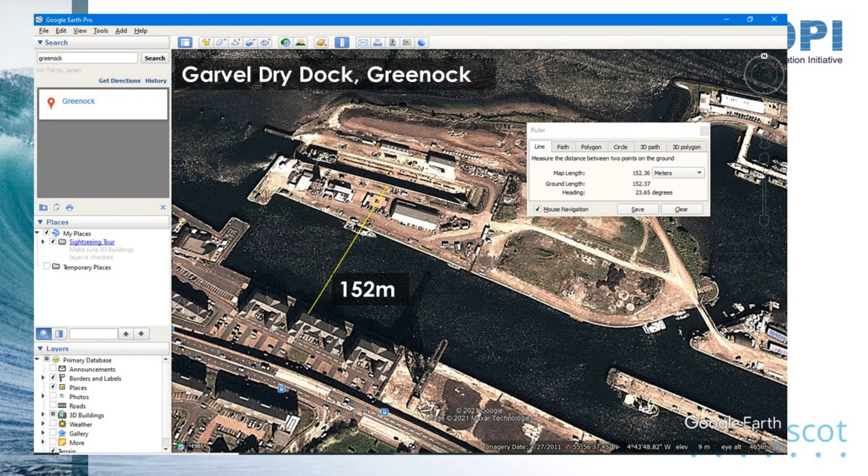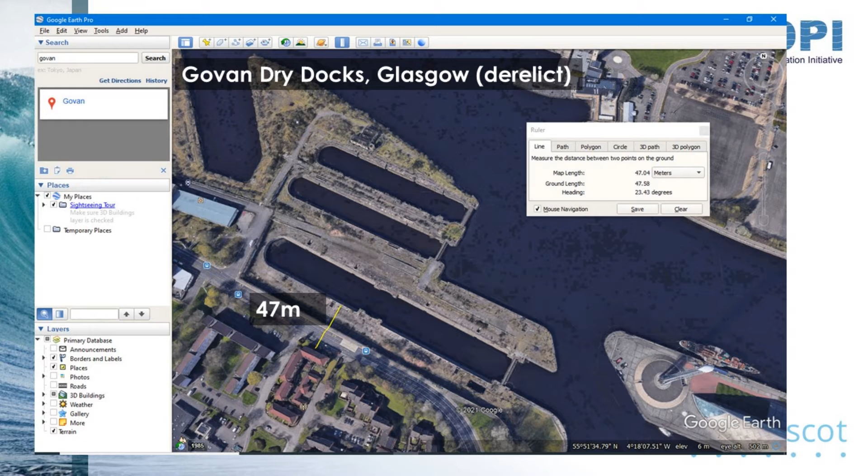Another issue with the Govan docks and waterfront sites in general is increased risk of flooding due to climate change. In the SEPA flood data, you can see the Govan graving docks are at high risk of coastal flooding, and there's a presumption in Scottish planning policy against allowing new, particularly residential, developments on a flood risk or floodplain location.

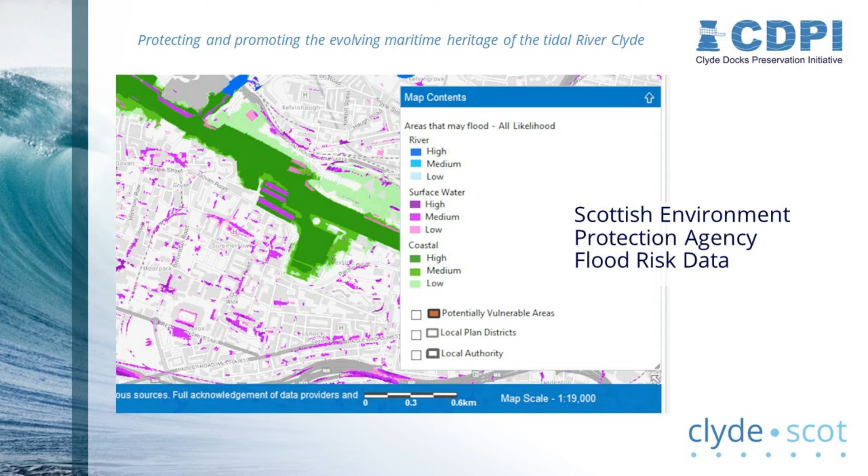But in the past few years, we've seen a significant shift in attitudes towards waterfront regeneration on the Clyde. The suitability of housing development is no longer a given. At the start of 2018, we saw proposals from Ferguson Marine to bring the Govan graving docks back into use as a ship maintenance and engineering facility. It's fairly certain, with the previous housing proposals being refused planning consent, that if Ferguson hadn't gone into administration over the ferry contracts, this proposal would most likely have gone ahead, even if it needed a compulsory purchase.

This is King George V dock between Govan and Braehead. We see proximity to housing isn't an issue here. It's surrounded by industrial estates, retail parks, and a large water treatment works. KGV handles mostly raw materials and bulk cargo vessels, and recently several cruise ships have been laid up here while out of service due to the COVID situation.

Rothesay Dock in Clydebank was actually closed for several years before being reopened not that long ago. This also handles small bulk cargo, and there's a marina and fuel bunkering facility here as well. Of course, bunkering of new fuels is something that sustainable shipping will depend on, and that's something we'll need to think about for the Clyde.

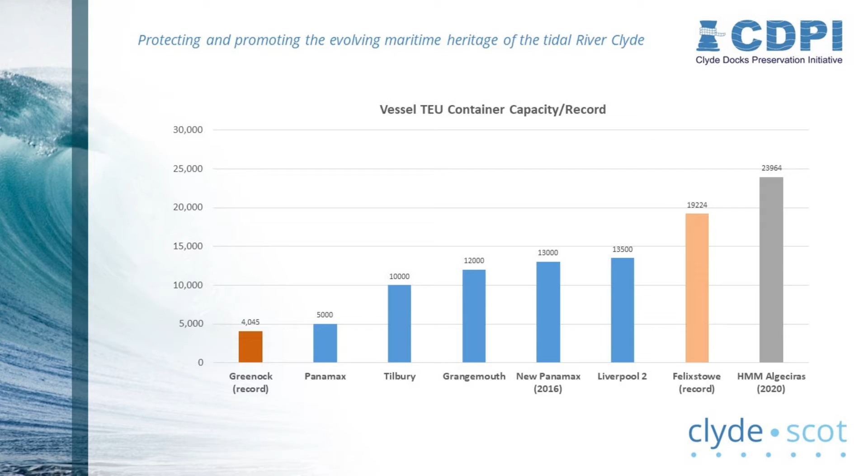If we look at the berthing depth capacity though, it suggests that Greenock could handle more, at least on the seaward side. Though, as mentioned, the lack of a rail connection could be a limiting factor, as well as perhaps available space for storage at the terminal.

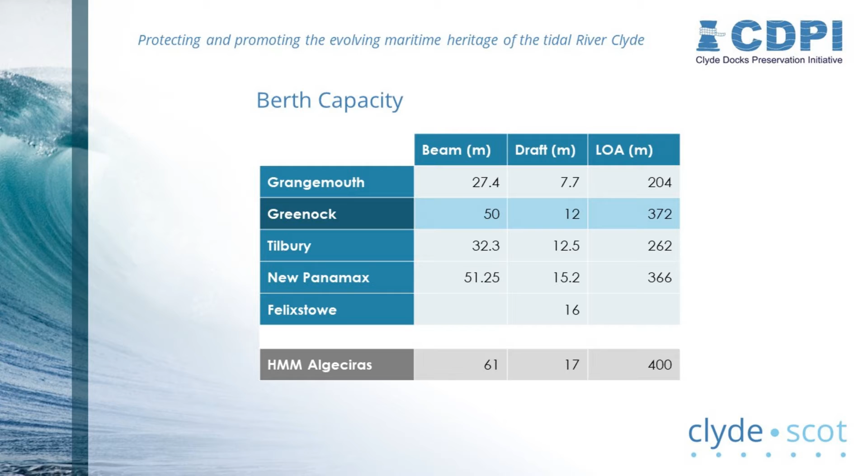So what all this points to is that perhaps the future of the Clyde is in smaller scale operations, but with a focus on developing new technology and innovation. We've already heard in the first webinar about some of the technological potential in sustainable shipping, and we have the strong association with shipping and maritime heritage as an added incentive.

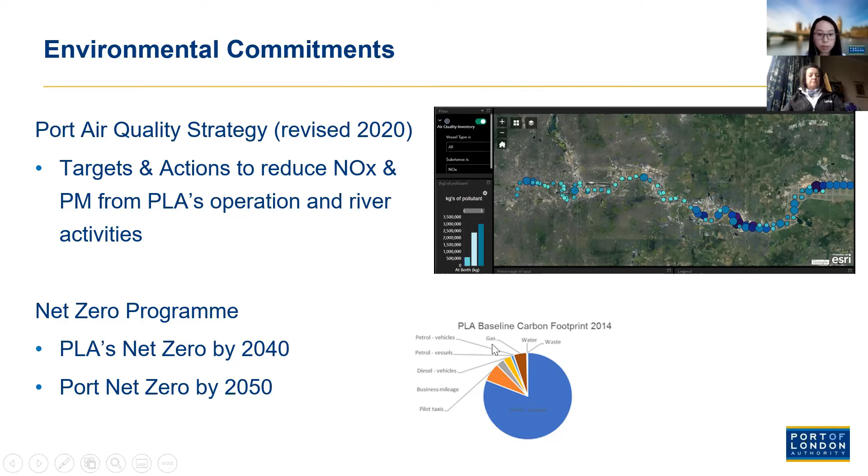One of the actions within the air quality strategy is that the PLA has completed a so-called emissions reduction roadmap for the inland vessels. It's there to offer direction in reaching current and potential future emissions targets through the adoption of existing emissions abatement technologies, such as DPF, diesel particulate filter, and SCR, selective catalytic reduction, together with the use of low carbon fuels such as biofuel.

It's also looking at emerging low and zero emissions technologies, such as fuel cells, battery technology, and hybrid diesel.

Today, the focus is going to be on reducing emissions for the PLA as an organization. Here, the two orange brackets highlight the scenarios and vessel types most relevant to the PLA's duty - for existing vessels, looking at abatement technologies and low carbon fuel.

For any new vessels, depending on the energy demand, operational profile, and timeline, we should either consider hybrid, battery, or fuel cell technologies. The line is just an indicator of where we are now and what we should be considering. This roadmap has set a perfect background to understand what, when, and where the supporting infrastructure might be required to achieve our targets and goals.

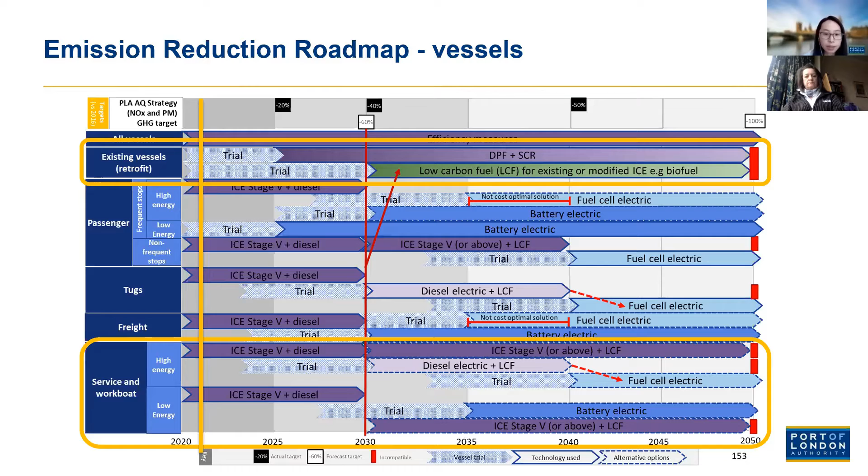So just to show you some of the work that we've done so far on our vessel fleet. Here is one of our patrol vessels. And to reduce fuel consumption, solar panels have been installed on 2 of our upper district patrol vessels, and it's there as a supplement power to the onboard electrical system, with an aim of reducing the fuel consumption.

And here is the UK's first pilot cutter leader that was delivered in spring 2019. The hybrid vessel can run on batteries for approximately 40 nautical miles on one charge and up to a speed of 15 knots.

Also, as part of our air quality strategies, we have undertaken an alternative fuel trial study, which monitors the engine performance and also analyzes the exhaust gas emissions in terms of the air pollutants within those exhaust gas. Following the trial and the monitoring, the PLA is now adopting a phased approach to biofuel switch across the vessels within the PLA fleet.

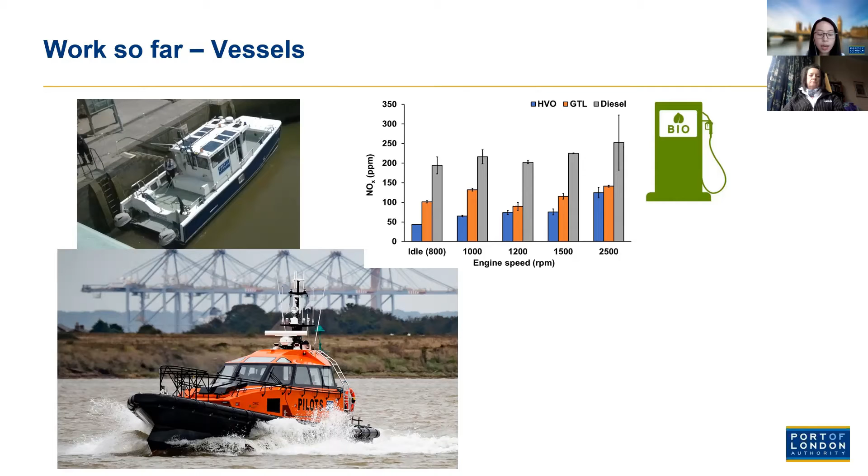Last but not least, the PLA is also retrofitting one of the vessels, Driftwood, with an SCR, with an aim to reduce the emission of NOx. This vessel is used for collecting rubbish and driftwood along the river.

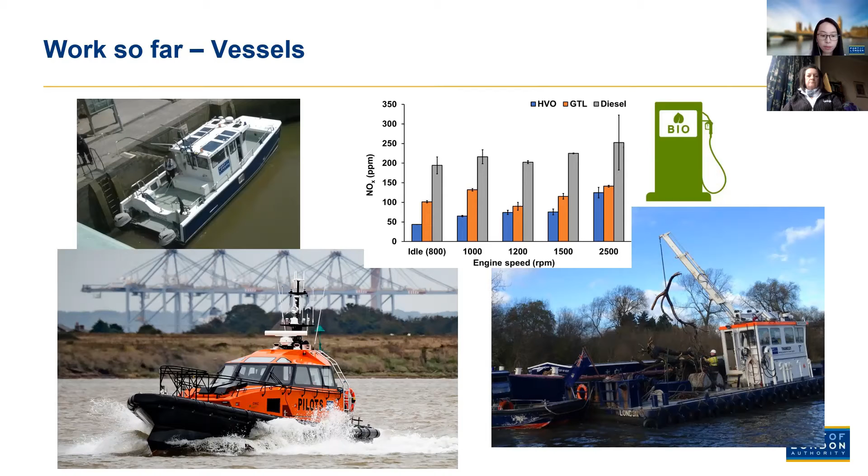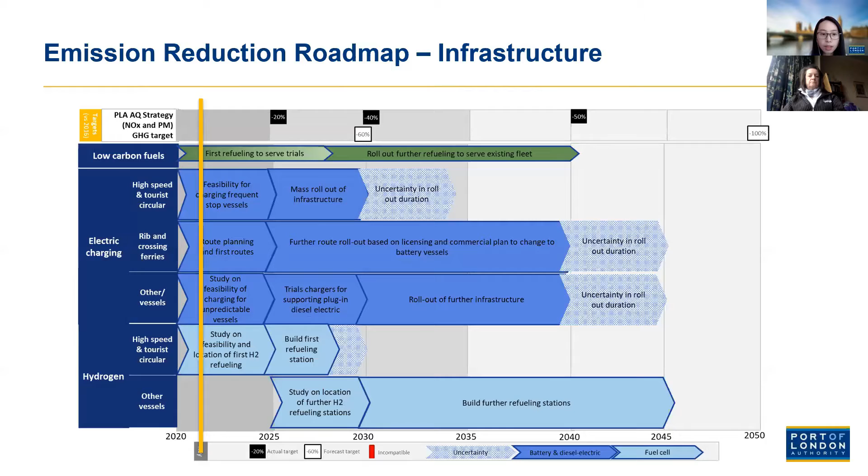We have also linked up the new pier with the electrical grid, to allow vessels to plug in when it's at berth.

We have also installed solar PV panels on our building roofs at 2 of our office sites, at Denton and in Gravesend, to generate renewable electricity. Roughly, these new solar panels can generate 120 megawatt hours per year.

And we're also looking at installing a new substation at one of our operational sites at Denton, to cope with the increase in electrical demands from vessels and also from vehicles.

We can't look at them in isolation. So instead of just looking at the future demand for the vessels, we're also recognizing increased demands on land as well, and all other energy saving infrastructures that the PLA has been having since the 90s.

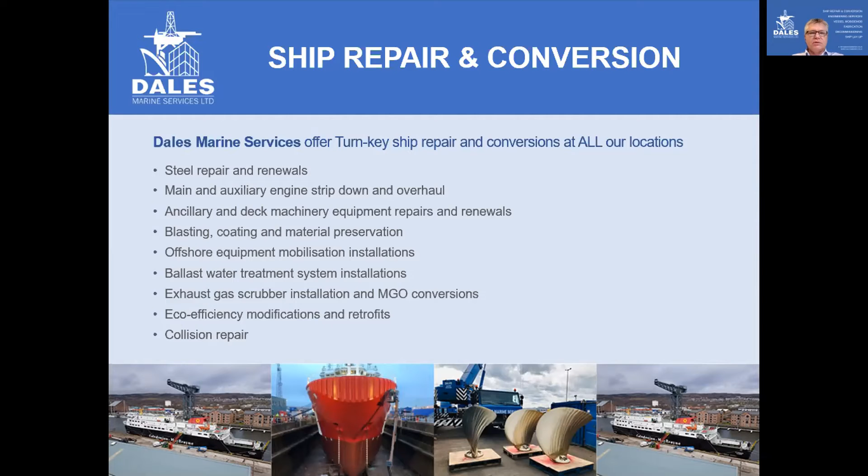Fabrication, as you would imagine, steel and welding is very much connected with shipping, but we don't just do shipping. We fabricate anything. If it involves a bit of metal and some welding, we want to get involved in that. We manufacture lots of different things, we manufacture bridges, you name it, we'll do it. So we've had to diversify slightly as the world changes. It's not just shipping. We'll fabricate anything at all for anybody of any size.

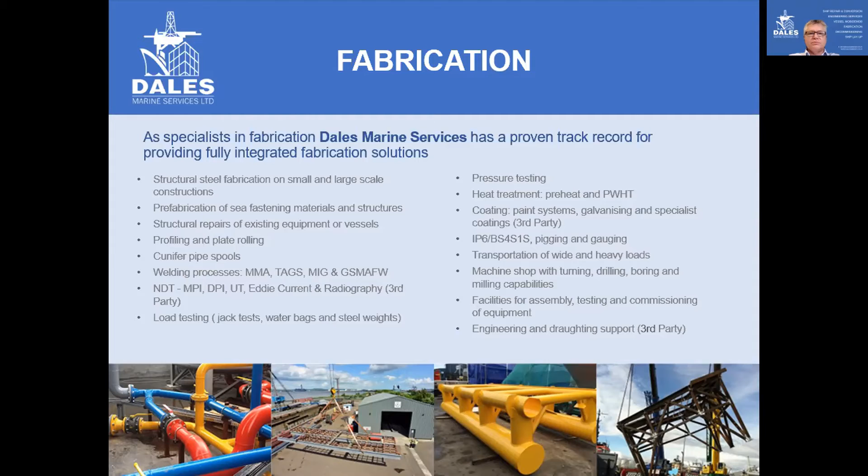Probably one of the longest standing services with Dales, which is how it all started up in Aberdeen, was engineering. And this is an area that is changing very, very quickly, and as I said earlier, we're trying to stay on top of that. We have various vessels coming in doing conventional strip downs of pistons and cylinder heads changed and all the stuff you'd associate with engineering. But equally so, we have vessels coming in which are hybrid, and we are adapting to that as quickly as we can as those new power plants come in. So engineering is the backbone of the company, but it's also probably one of the fastest changing services that we provide.

Mobilization and demobilization - we get involved a lot with the renewable sector in this, whether it's tidal, wind or wave. We have units arriving that need to get mobilized onto support vessels to be taken out to the fields, and demobilized as they come back for change of purpose. Predominantly Aberdeen and Leith are very busy with those, as that's where the biggest activity is right now with the renewable sector. It used to be we were doing pipelines and things like that for oil and gas, but we now regularly get involved in mobilizing for wind, wave and tide.

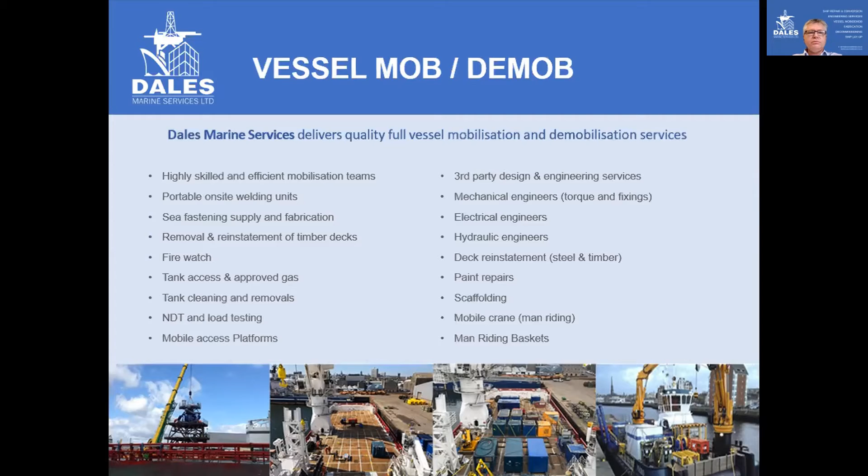Decommissioning comes with a sustainability part - we offer a full cycle really for vessels. In 2017, through demand more than anything else, we started getting involved in the recycling and decommissioning of vessels. That has grown significantly in the world we're in now, with ships laid up, so we have a very full order book for the decommissioning of vessels. Up until the 1st of January we were registered with the EU, but we're fully SEPA approved, and we can do this at any of our dry docks.

We offer the storage and sale of spare parts, so end of life items can go into the aquaculture sector - winches and all those sort of things. We're a registered ship recycler, so there are lots of hoops to go through - we can't just cut up ships. It's very controlled and very efficient, so it's an interesting process that we're involved in.

Some of the vessels we've been operating on - we've got the Oceanic Pintail, which is in Leith just now being decommissioned. She's an ex-nuclear carrying vessel, and we towed her around from Barrow-in-Furness to the Leith dock. That was towards the end of last year, and she's currently in the process of being decommissioned.

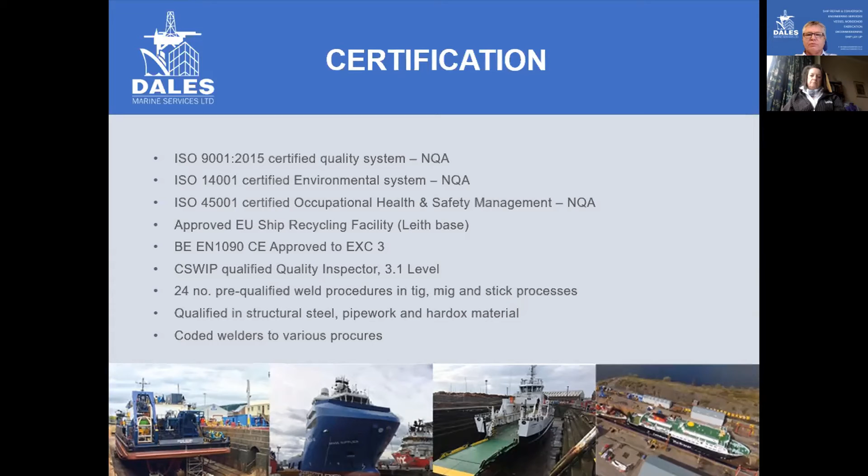That's great, thanks so much Andrew. And I should have also said that you've got over 3 decades of experience as a professional yachtsman in the leisure marine sector, as well as developing multi-marine businesses for the European market. Yeah, I jumped from one side to the other - it's the same, they all float, slightly different challenges.